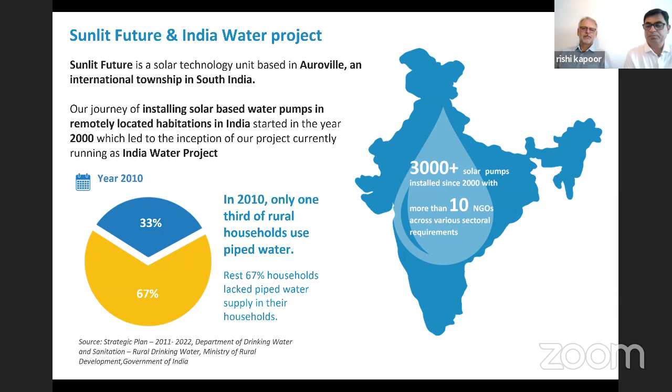We are working in about 8 states, as you can see in the map of India. The regions we are working in are mostly on the coastal belts on the eastern and western side of the country. These areas are prone to natural calamities and often hit by cyclones, which leads to repeated failure of grid infrastructure, disrupting the power supply for weeks and months altogether, and breaks the consistency in the supply of water. As you can see on the slide, we've reached about 200,000 beneficiaries through our work from 2014 onwards with the support of the PDJF/Grundfos Foundation.

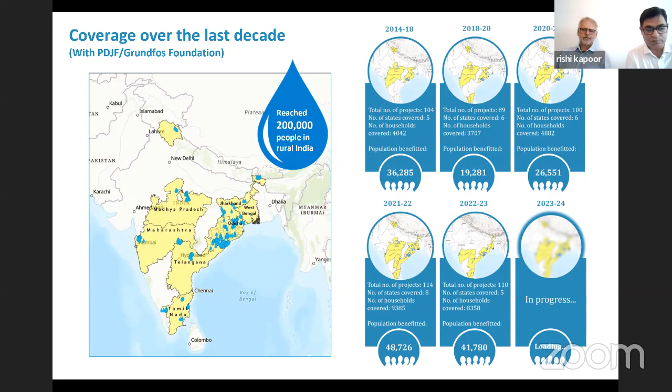Our approach has been to have three partners: a strong technical partner, which is where Sunlit comes into play, strong technical solutions from Grundfos, and a very strong local NGO partner with a community linkage which people trust. Sunlit Future has years of experience on the ground to design, install, and maintain solar pumps, and not only support the pumping part, but the supporting infrastructure required for each village, from identifying the ground source to storage of water, and designing the pumping capacity as per each village's requirement.

We have been using Grundfos pumps, specifically the 2 horsepower SQ Flex series of pumps, which have a proven track record and very low maintenance and operation cost. These pumps are designed to work from 30 meters to 250 meters and can be powered by 600 watts to 2 kilowatts. Very small solar systems run these pumps, and they are very easy to install and maintain.

The track record of working of these pumps is in the toughest of the regions. So the technical solution on the ground worked for many years. We also had a partnership with the local NGOs. The local NGOs had very strong community linkages, which had the trust of villagers.

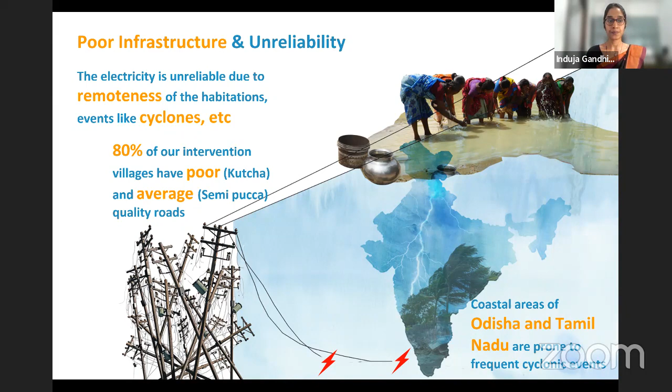Water quality is a huge issue in India, and it's very different from place to place. Non-availability of good quality water poses serious health risks and compromises a lot of sanitation practices in this population. About 35% of the rural population in India does not even have sanitation facilities in their households, which is a major concern. Next.

So all these issues, if we see at a village level or even at a cluster level, where this situation puts these villages in terms of having sustainability is, for example, if we come to the aspect of finitude, the availability of water, enough water for the utilities, is a big question. The water sources are not good enough to supply the amount of water that is needed for the communities.

And then coming to the aspect of fairness, how the water is getting distributed to different people, it poses a very big imbalance in the gender aspect; it is a huge gap that we see. And all these contribute to the fragility of the ecosystem. We have seen a lot of people in a lot of areas that we work in.

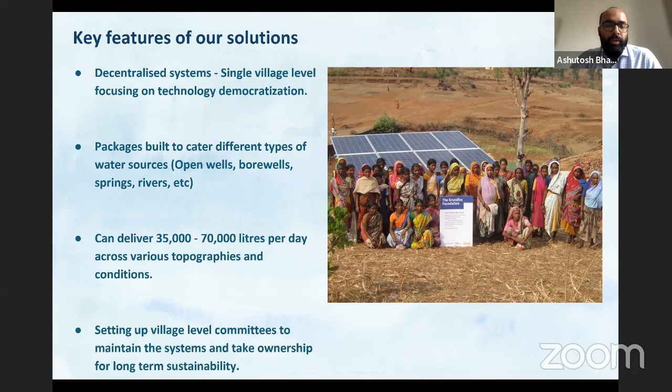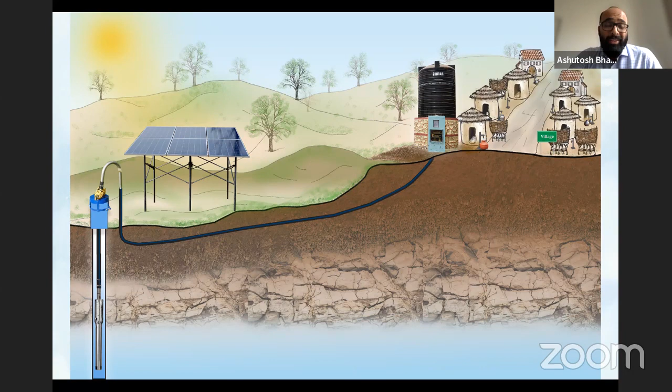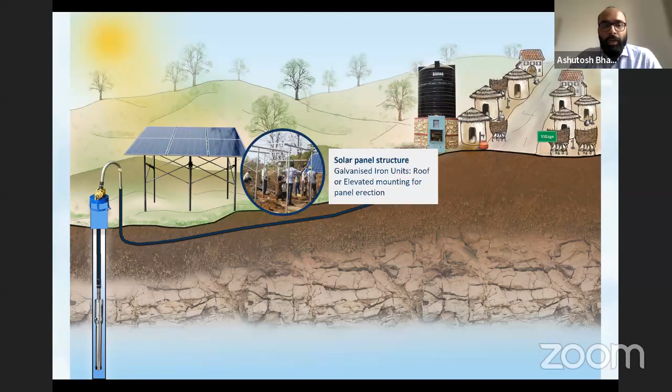These are usually installed on galvanized iron structures, which are roof mounted or elevated mounted depending on the region and the kind of installation. And these are usually connected from the source to the water tank through HDPE pipes and fittings. HDPE pipes allow us the flexibility of easy repairs, maintenance, and reconnections of new pipelines as needed compared to other pipelines. And they are very good in terms of durability. They have good UV resistance also.

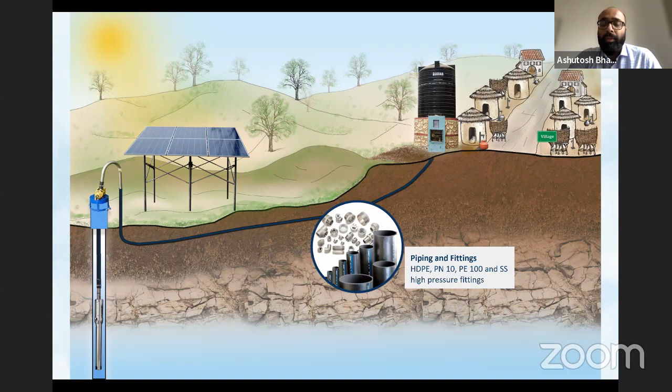Next. The overhead tanks are usually site specific. They are RCC overhead tanks in regions where use of PVC tanks is not adequate and a large quantity of water needs to be supplied based on the size of the community. Whereas in areas where there are small segregated communities, we install PVC multi-layer tanks, and these water tanks supply water to the houses, the kitchens, the toilets, bathing rooms, and through stand posts at the point of delivery for water usage. Next.

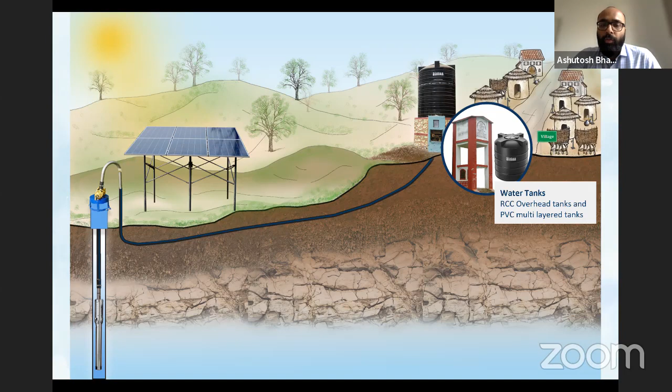Yeah, Induja. So that's our whole system. And if we see how our systems are addressing the aspects of sustainability, so to say, the aspect of finitude, before we intervene, we take care of carefully assessing the bore wells or any kind of water source where we are going to install the pump. We do an analysis of the water table levels to ensure continuous supply of water even in extreme summer and also during peak monsoon seasons. Next.

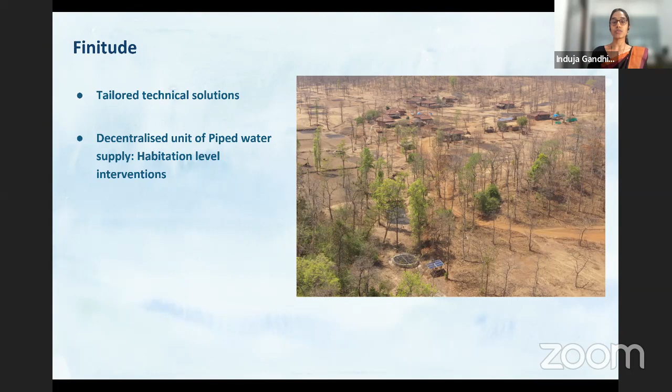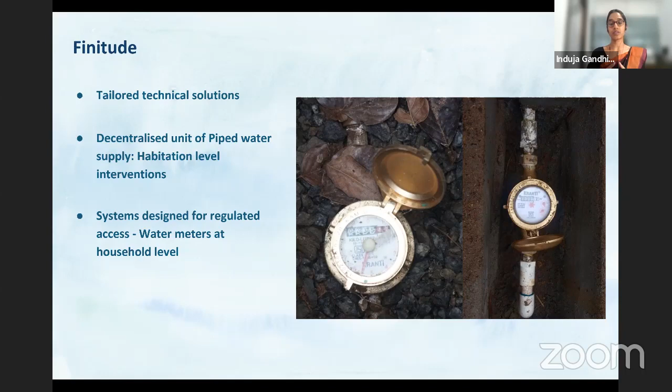And then, as my colleague mentioned, it is a decentralized unit, which takes care of the system level functioning within the community, and any repairs or anything that is coming up is not affecting a larger system. Next. So we have also tried out installing water meters in some of the villages to monitor and keep a balance on the water consumption by the communities. So this avoids overexploitation and ensures fair use of the water resource. Next.

And then the village water committees that we form, we have trained them so that they monitor the water quantity and water levels in the water sources, and they keep reporting to us, and we keep a check, and we take preventive measures in terms of an extremely dry season or something. So the whole responsibility is lying with the community themselves.

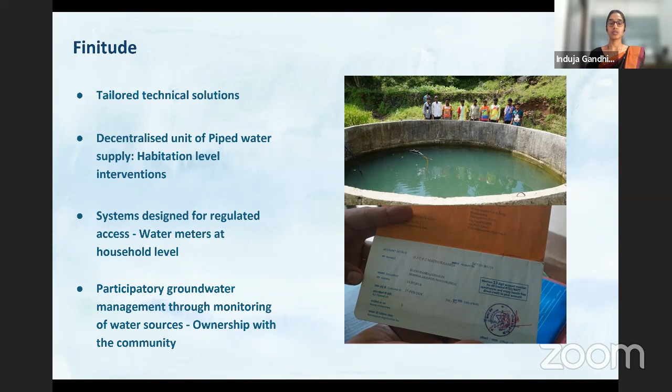Yeah. And on the aspects of fairness, we ensure that the water committees are put in place, and they ensure the social equity in terms of water supply at their village level. And we aim at a minimum supply of 55 liters per capita per day, and we make sure that that much is supplied for every household in a village. Yeah.

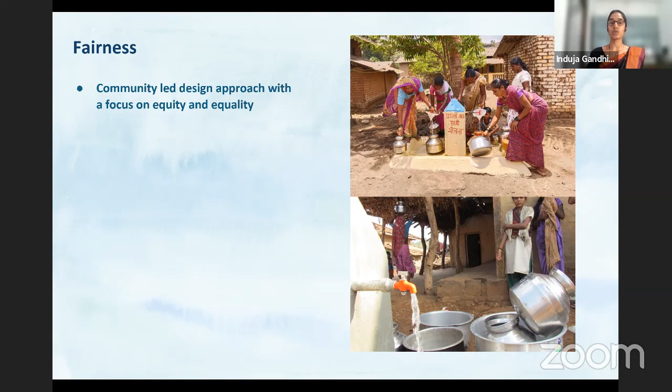And in terms of equity, we also ensure that in the village water committee, about 40% women participation is present, which takes care of the gender neutrality, and also representatives from every cross section in a multifaceted village are represented in the water committee. And next.

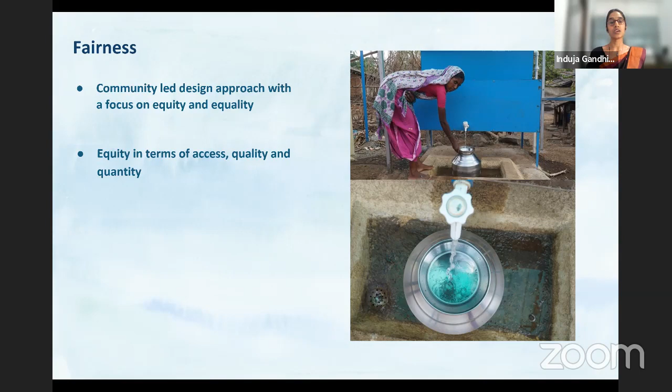Yeah, and our village institutions are trained in taking care of and running the systems, and we are constantly in touch with them through the local NGO partners, and they are the key people who are helping us locally to run the whole system and even to maintain the systems. And we encourage women participation not just in the water committees, but we have also trained a number of women as pump operators who run our systems.

So from not getting time to do any other activity, to now empowered as pump operators who can actually run the whole system and be in touch with us about technical aspects regarding the running of the system. This is a huge shift that our systems have created in many women's lives. Yeah. So again, coming to women who were half of their day engaged in fetching water. Now, anywhere starting from having leisure time to cook a proper meal and to eat on time, to doing some productive activities at home, women have really got back their time.